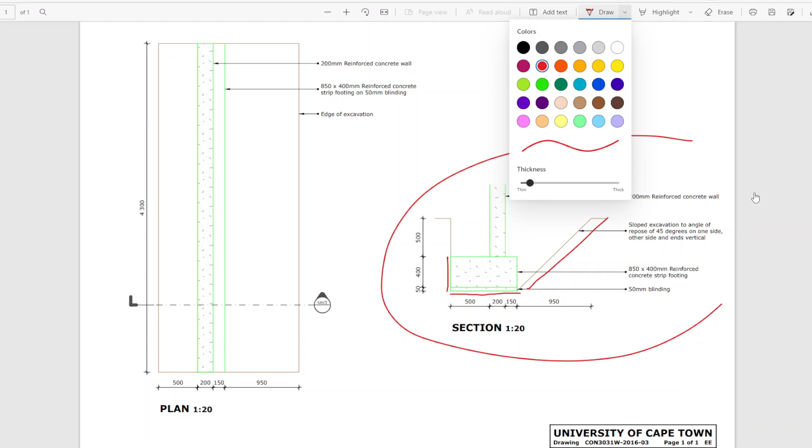So you need access to the surrounding areas, particularly when you need to add formwork. In instances where something is cast against an excavated surface, you don't need access, and I've seen this practically on site, where they just cast against the excavation where allowed. In some places they might require you to use formwork. In this drawing, because it's cut back at a 45-degree angle, the formwork to contain the concrete when it's cast in this footing needs to be placed there.

Some might argue that the blinding can actually just be cast against that angle and might be fine. Others might say, well, just put a piece of formwork all the way down and use the full height. I'll check the memo to see which one we used. So that's just a brief idea.

So I'm going to mark in blue where we need formwork. Obviously this wall, the foundation wall, is reinforced concrete, so we're going to need something to retain all this concrete pushing against that side. So without actually cutting back, I'm going to draw that they would have to prop this nicely to hold that, to retain that pressure. There's hydrostatic pressure from the concrete that gets poured into this formwork.

So from that face and on this face, remember when you're measuring foundations it's from NGL downwards, so both faces, let me just erase this top piece, want to be kicked out, as they say. Formwork gets kicked out by pressure from the concrete. So just a brief idea. That piece is going above NGL, but don't worry about it. For the sake of measurement, that's what our formwork will look like for the foundation wall.

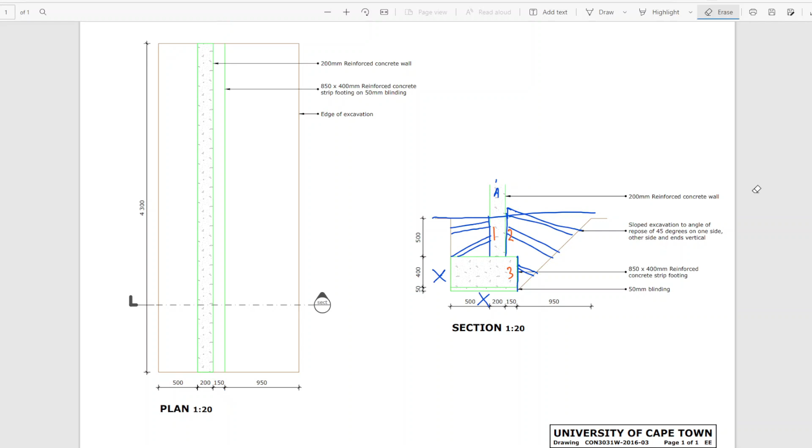And if we can't cast against the soil at areas A, we are going to cut back, we're going to have to cut back to put our formwork in. So over here, let's just do the cutting back in red. We're going to cut the box, and the soil will actually just continue where it is around it, but you're going to make that void in the surrounding soil up to NGL.

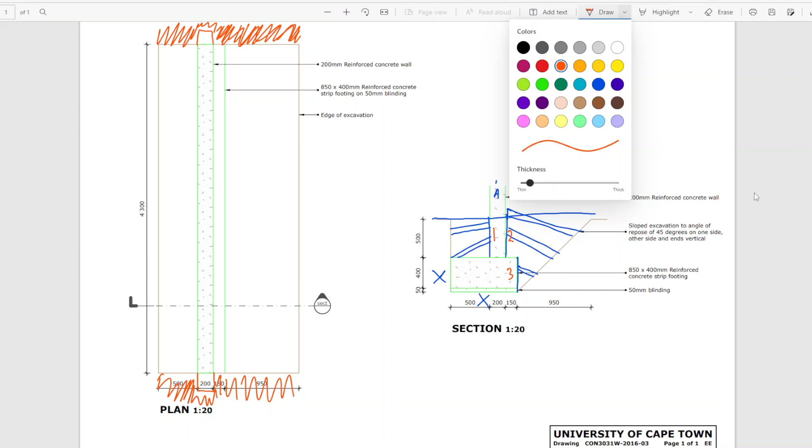Now it's not entirely practical, but this is how it is measured. And once you cut that void, your formwork is going to be placed in there, on both ends, and then similar to what we have here with the propping, we're going to prop that little piece against the surrounding soil. This is a top view, so you have to visualize this kind of stuff. It's going to be above the footing, and there's going to be a tiny little sliver inside there.

What would happen in reality, I think, would be much, well firstly, yeah I can draw this now. In reality, but not how it's measured, I would say that space is much bigger. Just for the sake of interest, I would say this is probably, if this is a 200 wall, you'd probably want space for propping as well, so it might be an extra 200 on each side.

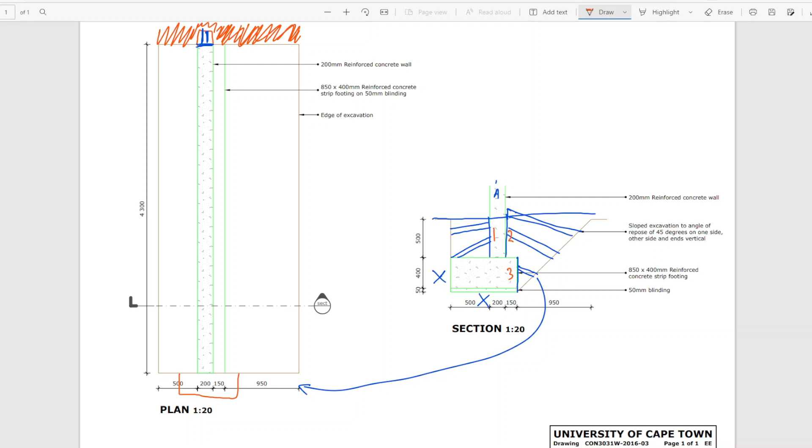And then for your shuttering or formwork would be like that.

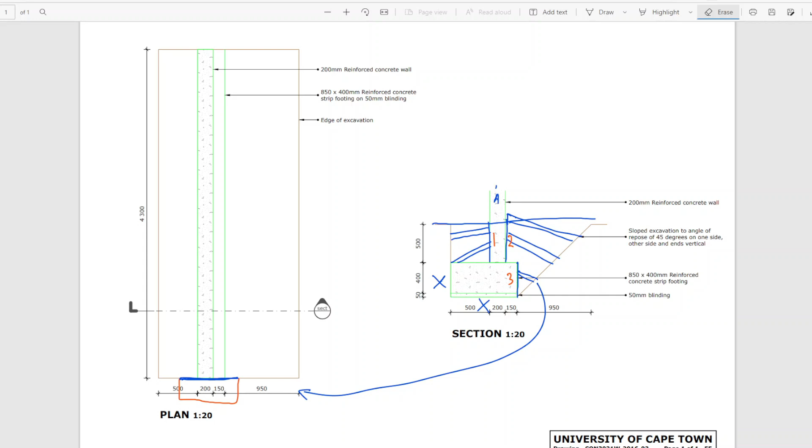And then if we start numbering these, you can get quite an interesting picture of what we're doing. We are molding the negative space.

So the positive space is the structure you want to remain, and the negative space, we're making a mold. You'd put formwork there, and I think just to be safe, I'm going to draw it as if it's measured.

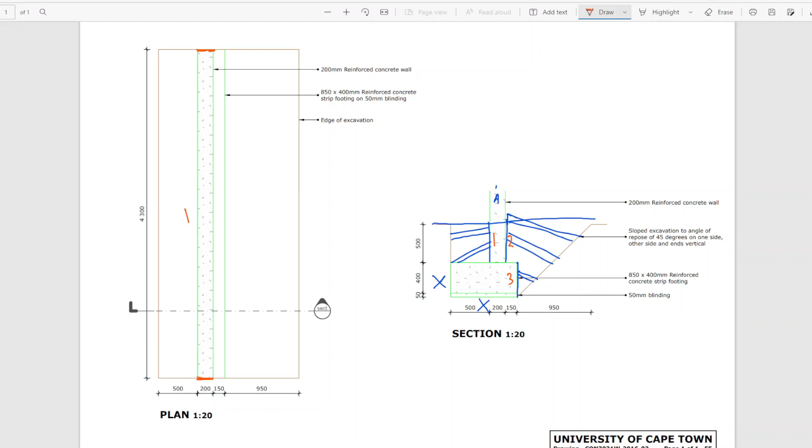Formwork there, exactly that size. There, you've got 1 and 2, so 1 is on this face, running that side. 2 is on this face, running this side. And 3 will be this piece on the footing.

And then you back prop everything. Let's number that 2, and let's make this one 3. So that's what the propping looks like.

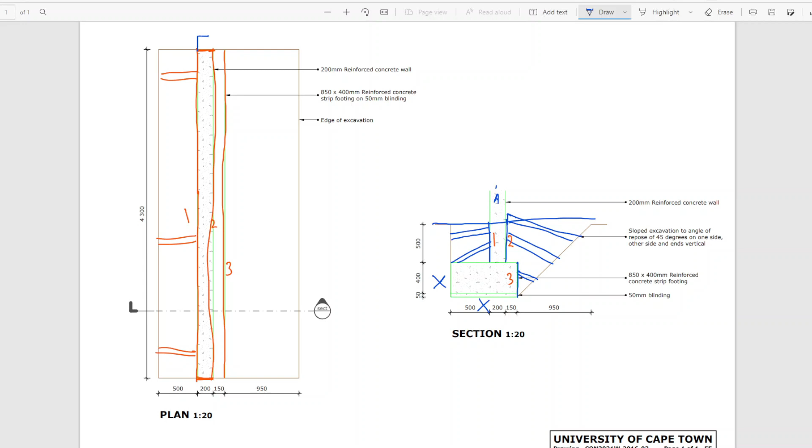The cutting for that one is like that. This one like that. Now, it's not so obvious how this slope needs to be cut, so I'm just going to cross over to the memo now to check.

So in the memo we've got that it's currently cut to the angle of repose. The angle of repose is the angle at which a material has not reached its sliding moment.

So a sliding moment is the point at which a material starts to trickle or slide down a slope. So the friction amongst all of these little particles is enough to prevent the gravitational force from pushing it downwards.

Now, if it's on top of each other, gravity will overturn these top little pieces to run down, sort of as a slope, as a little avalanche. So if it's at its angle of repose, we're happy that it's not going to overturn.

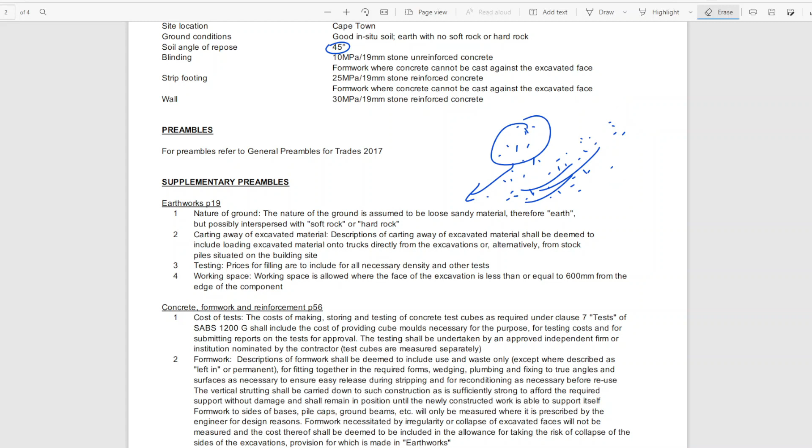Then we move on. What was the next thing here? It's worth noting that formwork

for concrete that cannot be cast against excavated faces. That's a rule I see has been put here twice. I'm not sure why it's not under wall.

It's under blinding and strip footing, but it actually should be here as well. It should be in 3 places, I think.

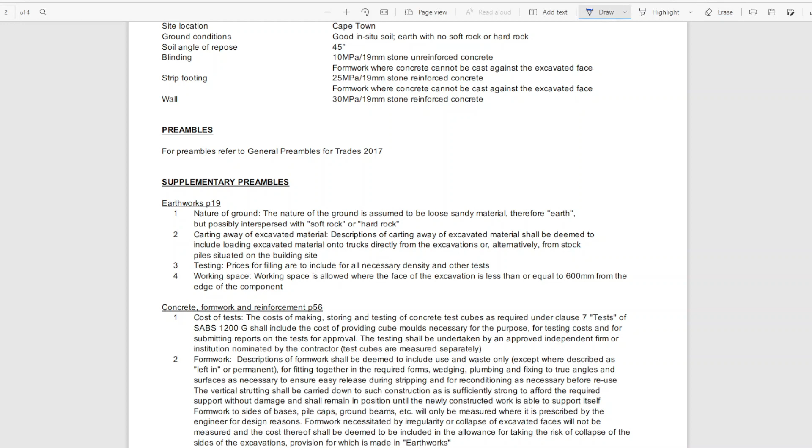So that's what we take out of that. 1 and 2. Then we have

this one's interesting, equal to, less than or equal to. So I'll tell you something interesting about this scenario, less than or equal to, particularly with this drawing.

This will be tested directly. There will be an item that's on 600, and I'll tell you why I had a problem with the drawing. Just go back. So I'm going to erase a nice little diagram with the propping and everything.

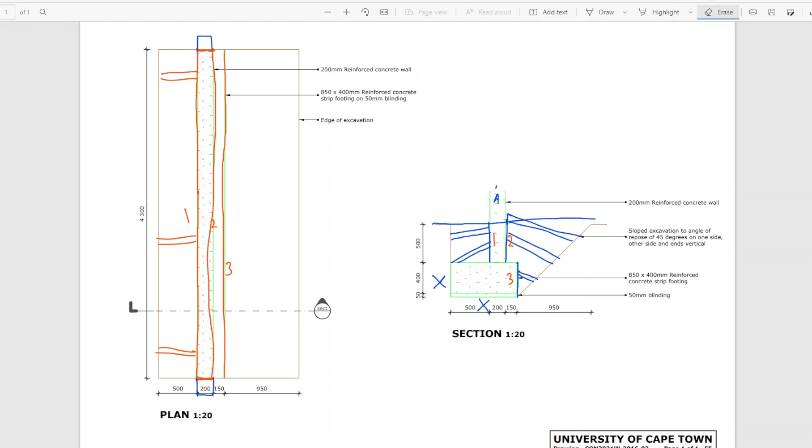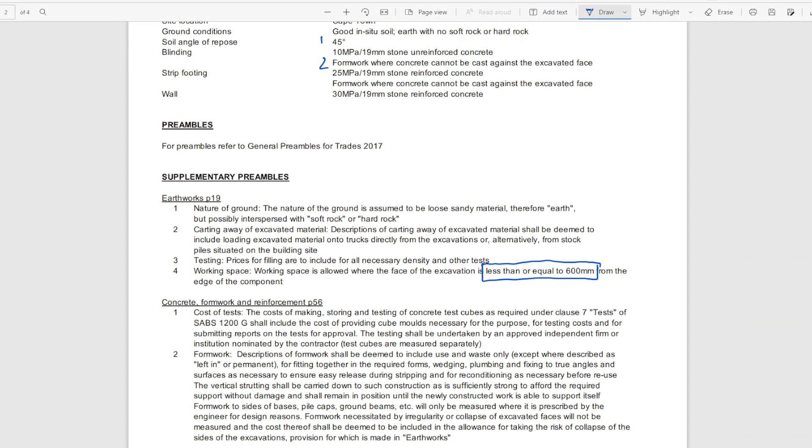So firstly, if we follow our rules, where concrete cannot be cast against excavated faces. And that was in, take a look here.

Yeah, so it was basically what I drew previously. That rule about where concrete cannot be cast against excavated faces was that rule of, you know, to retain the concrete from the pressure it's exerting. You can't just be cast in air.

You're going to make the mold, prop it up, and that's how it's going to be cast, from NGL downwards. But in this case, for the slope was an interesting case for me, because what I picked up is

that it's 450 to that point. So that's 450. And since it's at 45, this is also 450. So 450 is definitely less than 600.

So you know that you need to do some back excavation there to make working space. And that instance is clear enough, and maybe let's draw it so it's clear. Let's say we want to know exactly what's happening here. I'll do it in red.

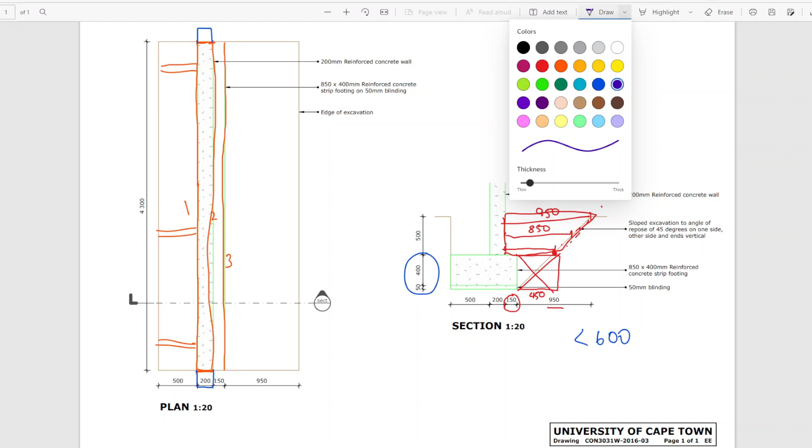So technically speaking, everything along this slope is actually fine. There's plenty of working space, but I'll tell you why we still measure this full height. So we've decided that above this 450 box we're happy, that it actually is enough space. I mean it's 850, 950. The only thing was down here, which was 450.

You know, if you want to be a bit ridiculous, yes, cut out a 1 millimeter for the guy so he has access to work there. But in my mind, it's sort of okay not to measure it. And this is where I was wrong - the standard system, if you follow pretty sound logic, says that you must measure this full height from NGL to the lowest point that you need access.

Okay, and the lowest point is 500 plus 400 plus 50. So this is 950. So you might say it looks like you've exaggerated what you really need. Do you really need 950? I mean, you only need this little box here actually, right?

And I would agree. But if you are to excavate this little box, my first argument is that this, since it's at the angle 45, it's going to collapse. So it would collapse and fill up this space.

And sorry, it wouldn't be like that though. So you'd cut and it would collapse to that line. So you'd first start digging out.

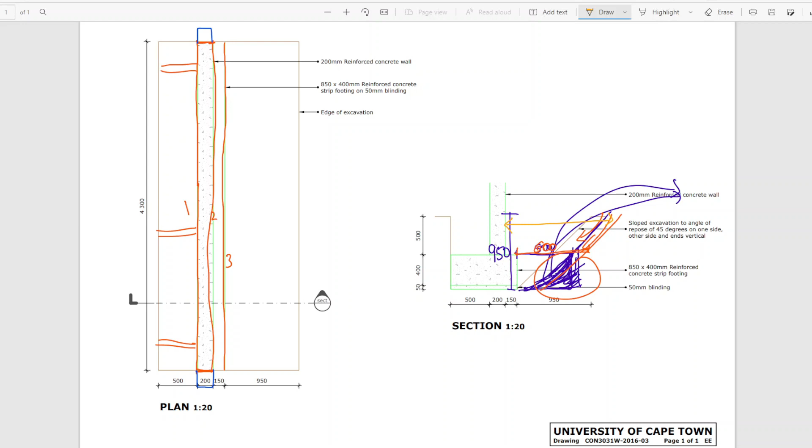So the standard system, I don't know if this is the logic that goes through it when they develop these things, but to me it actually makes a lot of sound logic, is that you cannot excavate an area lower than without accounting for what's above it.

If you take this as a case, if you want to excavate this face, you're going to have to go through all of this material up here. Right? You're not going to dig a cave just for the footing. It's just too impractical. You can't do that. Whilst this stays in place, it wouldn't happen. You'd have to excavate the entire height.

So that's what has to go through your mind - you might only need this point at the bottom and it's super small, and maybe it will cross your mind to just measure that, right? Because you're over measuring by a ridiculous amount. But now that we've gone through the logic, you actually are not over measuring. In a practical sense, you are doing exactly what would happen on site. You're going to cut straight down through the material above it, and then get to what you really need.

Right, okay, so that's pretty much what I explain. In the 90-degree example, you're going to have to cut through material straight down. In the sloped example, you're going to have to cut through material that's falling down.

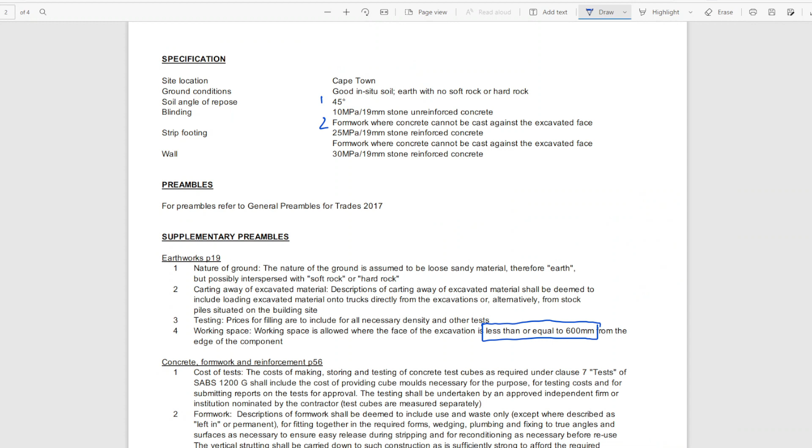Okay, risk collapse, water, rough formwork. So this measurement, 0.45, is the footing and the blinding I see. Some people might say you don't need formwork for blinding, but in this example we've measured to include the blinding. So that face gets formwork.

I guess if you want a system in your mind, it's to not calculate where working space is, but to first calculate where formwork goes, because that's pretty straightforward. It's obvious that concrete can't defy the laws of physics, it needs to be retained. You're going to put formwork to retain concrete. That's the first step that should go through your mind. Then you should ask yourself, now what are the rules?

The guy needs access. Whoever's installing this formwork needs access of 600 or less. So you must measure working space if it's less than or equal to 600.

So 500 is less than 600, which means... and another interesting part about measuring working space is that you do not quantify how much extra he must cut back here. It's not actually of our interest. I don't know, this might come up later on in the course, but maybe it should be measured, because 500 only has 100 mils of cutback.

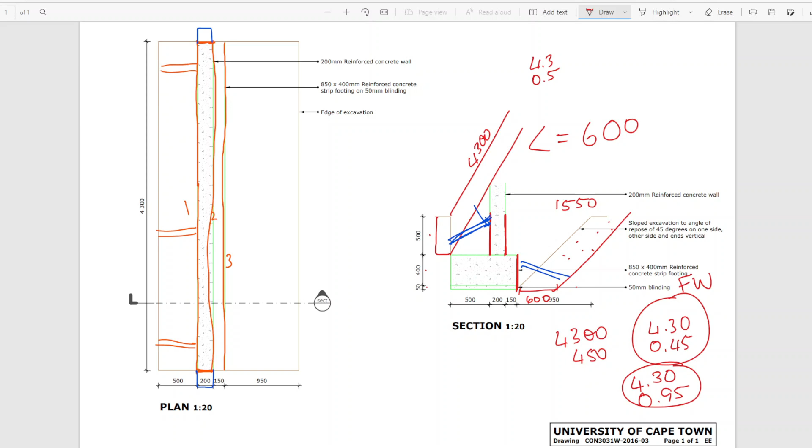Like I said, we're not concerned with how far back you're going, how much this material is. It could be a huge amount, it could be less. We just want to know, okay, square meters, you're going to cut back, make some space so he can put his formwork and his propping. So I think I've satisfied that.

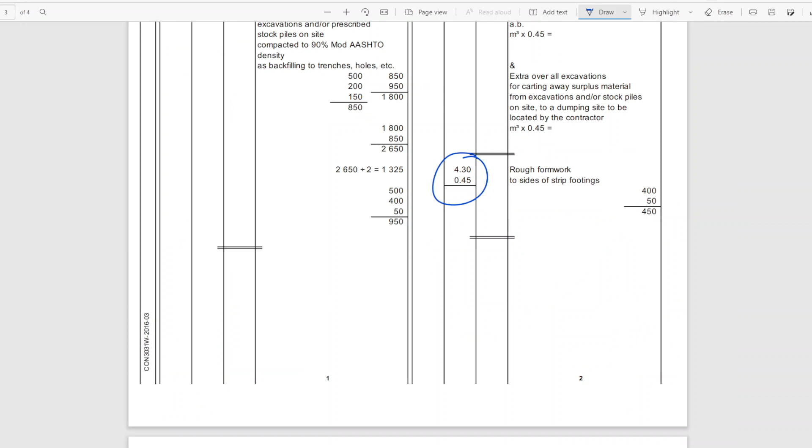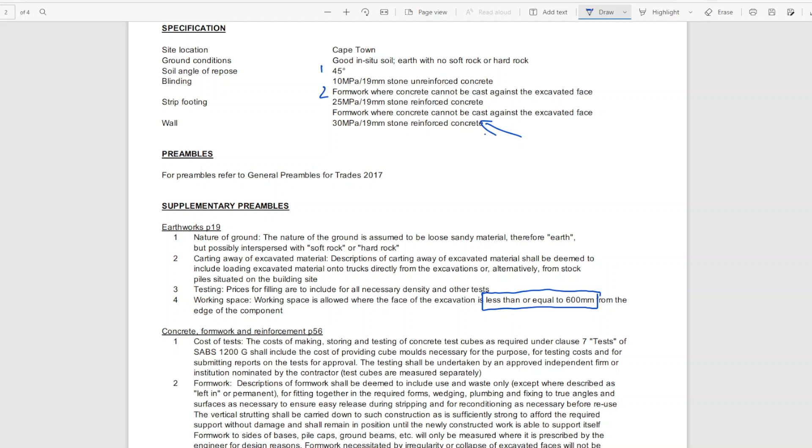I haven't spoken about the ends, but the ends are pretty straightforward. It's because the wall, and I think it must be in the spec - so what's interesting, the wall actually doesn't have it. So let's just check, let's take a look at the wall. Might be a problem with the spec, or maybe a problem with how I'm reading.

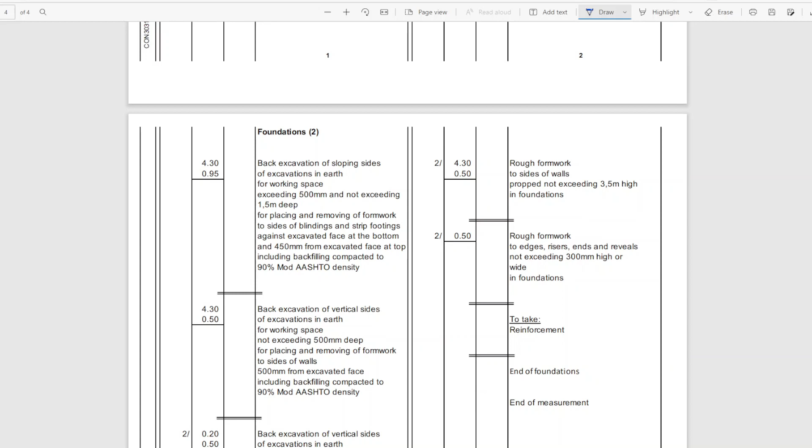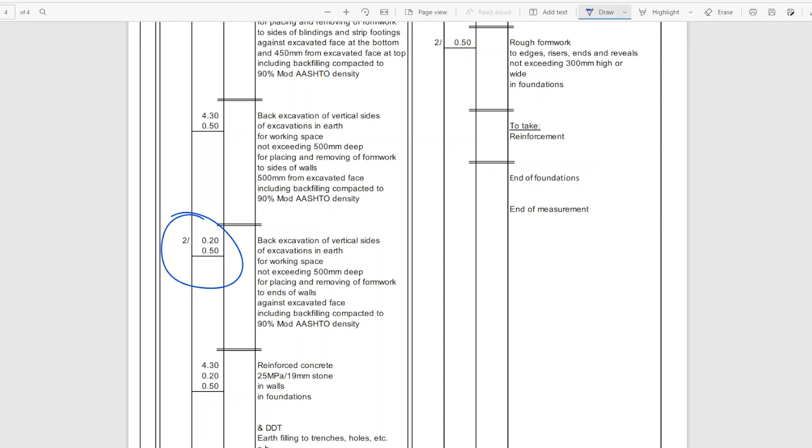So the wall is 0.2, right? So I see we've got a measurement for making working space, right? Where's the formwork? Okay, that's the formwork. So the formwork falls into less than 300 mil wide.

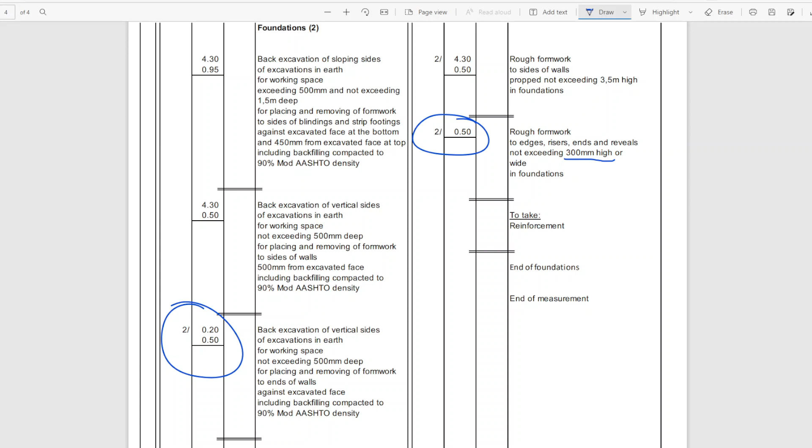So you just do a linear dimension, and there's two ends. Let's take a look at this one. The back excavations, it falls into this category, right? I haven't spoken about the category, but it's less than 500, then it's 500 to 1,500, and then I think it might be intervals of 1,500 after that. I'm not too sure. But our back excavation for the ends is two little ends of 200 mils each.

So we're looking at, where do we want to look here? Let's look here, okay, this is 200, and this one's 500. Like I said, we just want a square meter measurement, we're not concerned about how much you must dig. This actually is the biggest example of how much you need to work, because the minimum is 600 and it is flush now with the excavation.

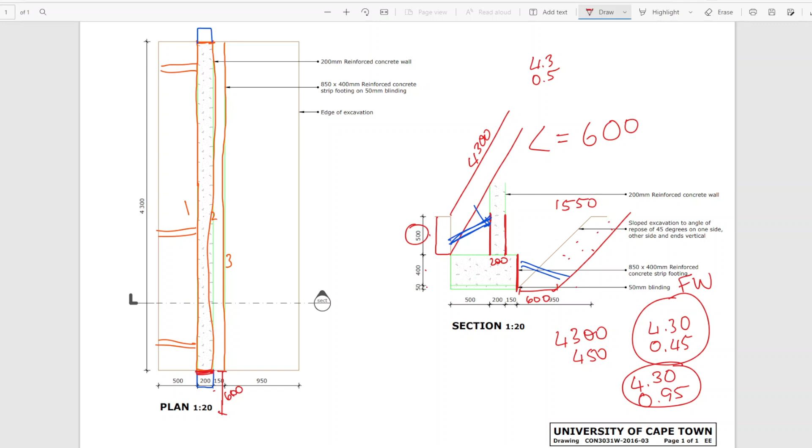So that is quite a big cut back or back excavation to make space for that work there. But we don't concern ourselves with that. It's 200 by 500 and there's two of them, and each one looks like this - one, two, little box cut out there in the soil. It's not practical, and I've been through why, but that's not a concern for us.

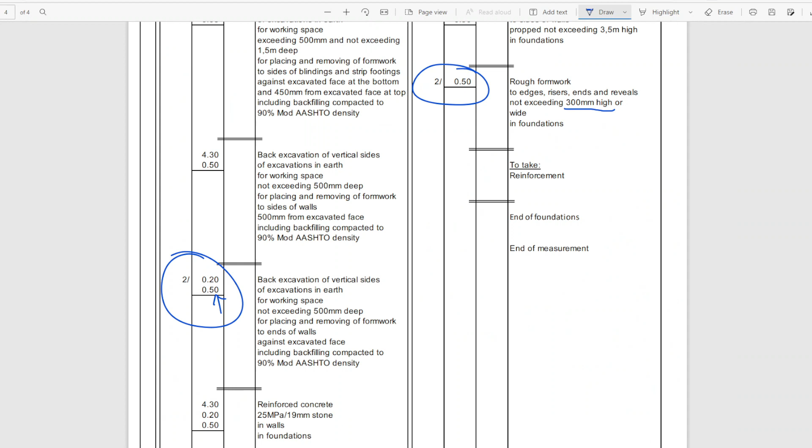And that's that. I just want to go across to some drawings of working space. So if you do some investigating, this one for example is a video - but okay, well now I've lost the picture. Here we go.

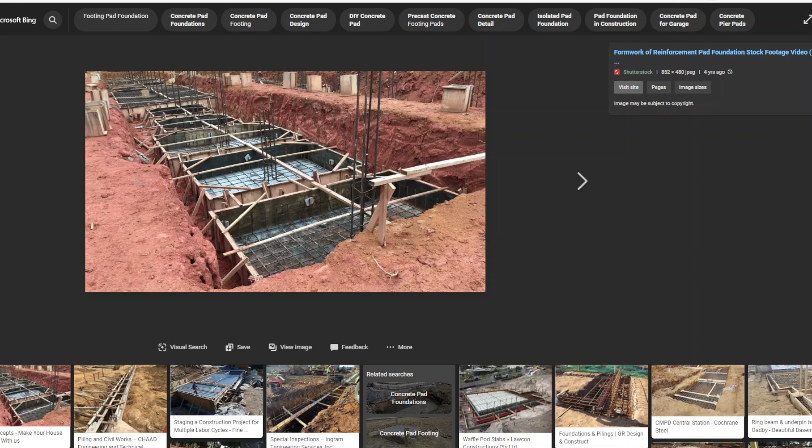So you can see how much extra they end up cutting back here. But just take a look at a couple of practical examples and you can see clearly why we need working space. When formwork comes in - and I've worked in, like for instance, this one is actually not great ease of access - working in situations like this is actually quite important to get good quality formwork, properly propped. It's not going to fail or kick out, it's plumb. These things need working space so a laborer can actually do his job to a high degree of quality. That's for footings, and I just wanted to check foundation walls.

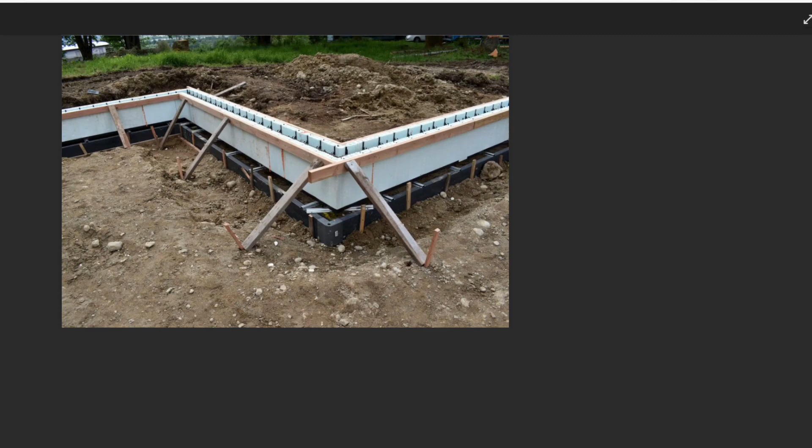So if we take this as an example, if you've already excavated for the footing, this looks really high already. This is the wall, we've already come out of NGL. But let's just use an example: if you've already made working space for your lowest area you need access, by virtue of cutting at the bottom here, you've also got to cut away at the top. So it's measured once from the lowest point. That rule should make perfect sense to you, because I've explained it a couple of times now.